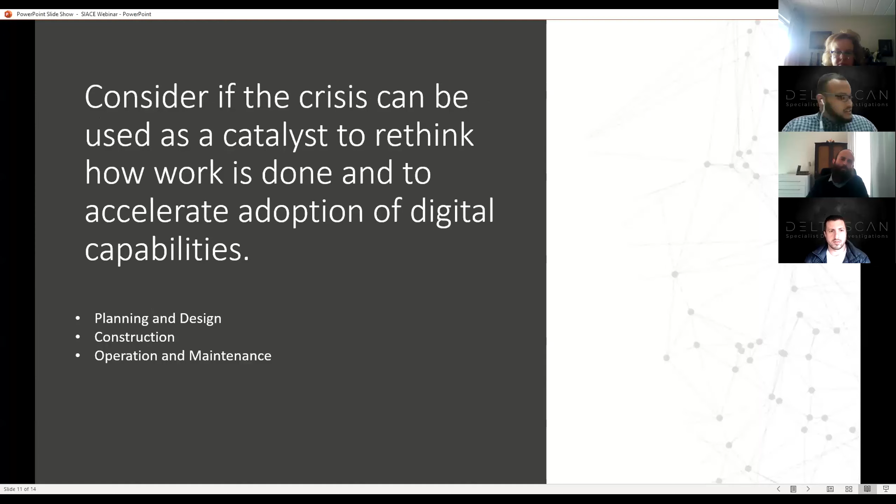Quickly, to speak around the technological pillars we'll be covering today: we are currently living in a world where there is a paramount amount of data around us. It's data, data, data, there's just more data. But us being pioneers, the best way of going about this is converting that data into knowledge, identifying the trends and patterns, optimizing the operations based on the trends and patterns one could extract, and then the final stage being the real-time decision-making process based on the more efficient data one has achieved.

It's at this stage that I want to hand over to our first panelist, Darryl Epstein, where he will be discussing some of his work that he's been doing in the industry, specifically around the engineering workflow. And then from there we'll be moving along to the rest of the panelists. Darryl, if I can hand over to you, I'll just stop sharing my screen quickly.

Cool, thanks Daryl. Okay, I'm going to just jump on my screen as well. Afternoon, evening everyone, thank you for joining. I'm very excited to have everybody here and to share some of the work that we're involved with. Really what it's about is education, getting the industry educated on what's going on in the market, what's happening elsewhere overseas, and how to swim and make it through these post-COVID times, and how digitization plays a part in that.

I'm a civil and structural engineer by profession. I started in contracting, I moved into design, and during my design stages I fell in love with tech. I fell in love with innovation in the markets. I love designing, I'm passionate about the designing aspects, but I fell in love with 3D. And that's one of the main reasons why we started that poll. I'm going to go into that a little bit.

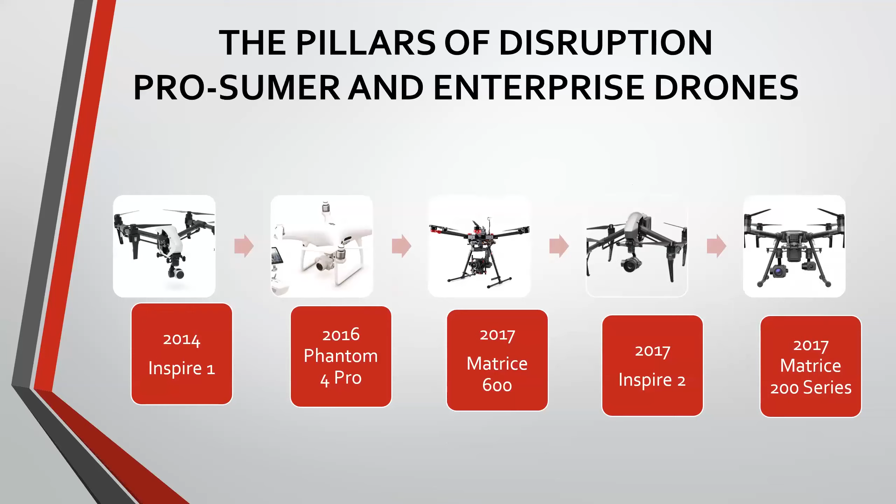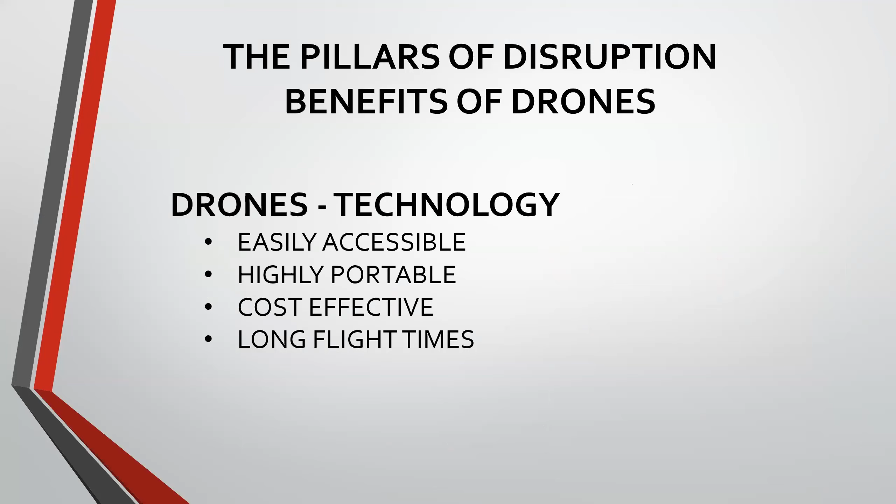There's a lot of very exciting drones on the market. They each do different things, but they basically carry your top of the range modern day sensors, your top of the range cameras that you can use in movies. You've got specialty payloads and many others. Why we turned to drones initially is, well, it's really the most accessible and cost-effective means of collecting data. If you're comparing it to your scaffolding, your cherry pickers, your rope access, it is very, very effective.

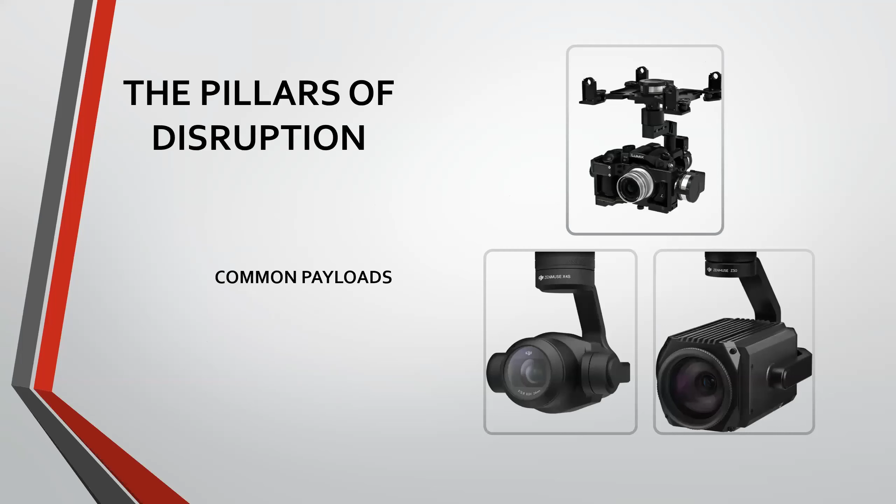Different camera systems we make use of. I'm not going to go into too much depth right now.

What's important to touch on is the technological progression, and this is the progression of comfort levels. It's really important to understand this. Starting out 20, 30 years ago and much further back, everything was done by hand. This is your engineering office, it's about hand drawings, calculators, rulers, and pencils. The limitation with hands is that it's not so easy to make changes and it's not so quick to get information out.

The next progression went into CAD. CAD came into the market and it provided efficiencies and adaptability to changes, because all of a sudden you can just delete a line, add a line, and you've made the change on your drawing, on your design. This is where a lot of the market got very comfortable. It took a big step to move over to computers, and there was a lot of resistance.

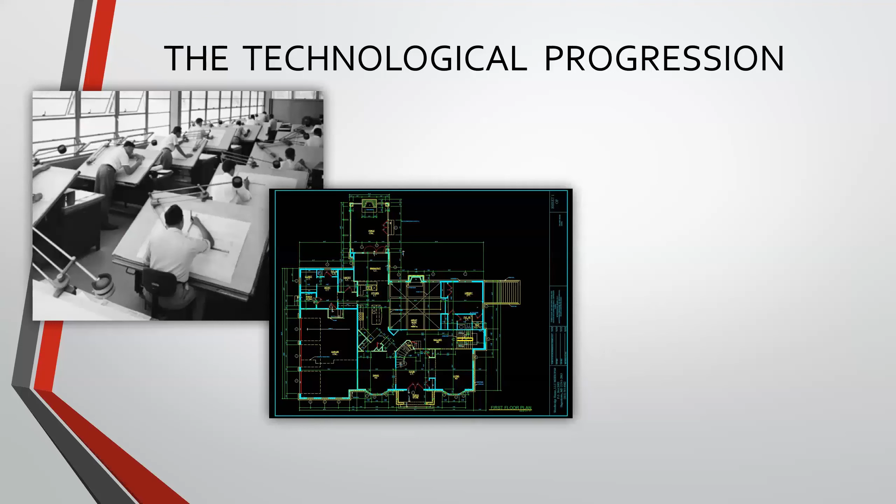The next change that happened after that, and the change that we currently experience, is 3D, three-dimensional designing. That's really about BIM, about integration, and integration being the key component that you can start fusing your information. You can start fusing your workflows with other disciplines. MEP, plumbing, electrical, architecture, engineering, now all work together. There's a really powerful synergy that comes together when you start working in the 3D environment.

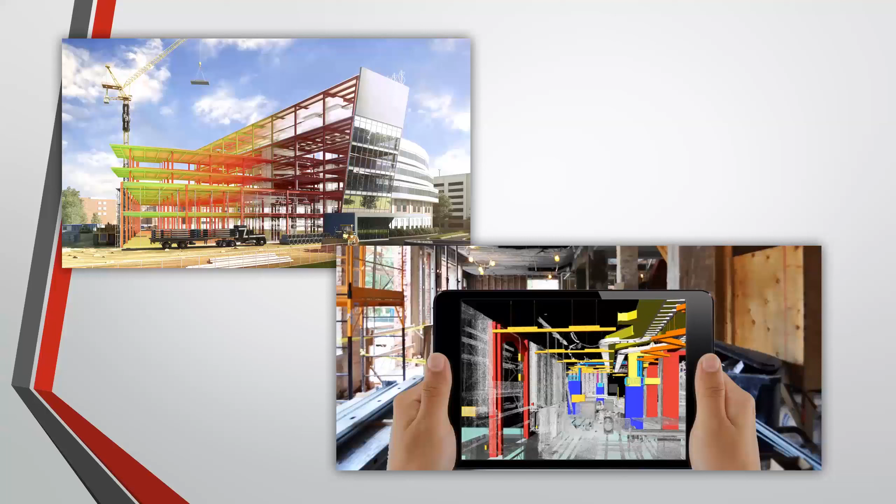What's now started happening is that 3D has become the norm. A lot of companies have adopted the 3D workflow, and the next revolution coming out of that is what we call 4D, or four-dimensional designing. We're talking about things like virtual reality, augmented reality. What 4D is about is two things: automation, bringing a lot of automation into the workflow, as well as optimization. Now that we're doing our designs, how do we optimize the way we do it?

Post-COVID-19, this is more relevant than ever, because what we're really looking for is how do we optimize the way we work now, and how do we go forward in this new era?

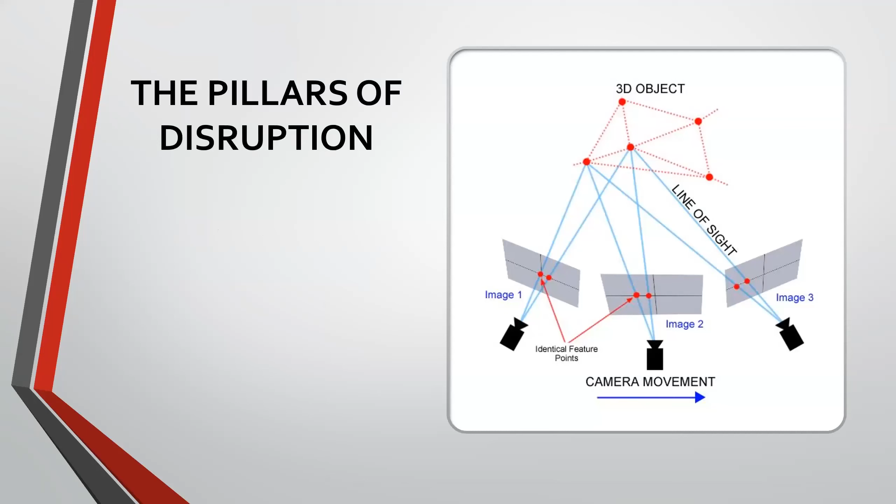So what we focus on is photogrammetry, digital workflows. Essentially what it is, is extracting depth from photographs. We take photos with the drones or from handheld sensors, and we reverse engineer what those photos show. It works the same way that human eyes do. One eye perceives colors; with two eyes, because there's a gap between them, because there's a space, your brain can make out the depth of an object.

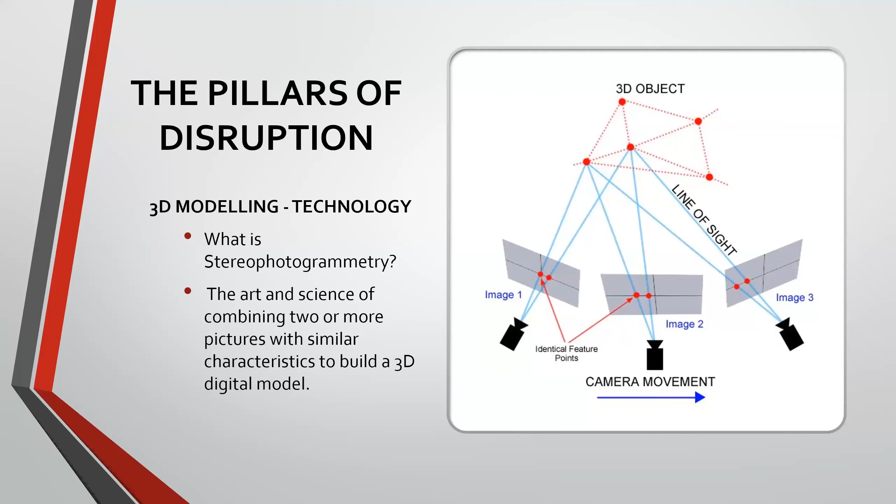The same reason that all modern day smartphone cameras have more than one lens: it's all about depth extraction. When you apply that to photography, you can reverse engineer 3D, you can reverse engineer engineering information. So we focus on infrastructure, and infrastructure is our game.

There's a lot of other uses for drones: surveying, surveillance, cinematography, agriculture. Companies that have embraced this tech are many, and this is one of the big fears in the market. Who's using it? How do we use it? Does it work? It's a technology that a lot of people are afraid of.

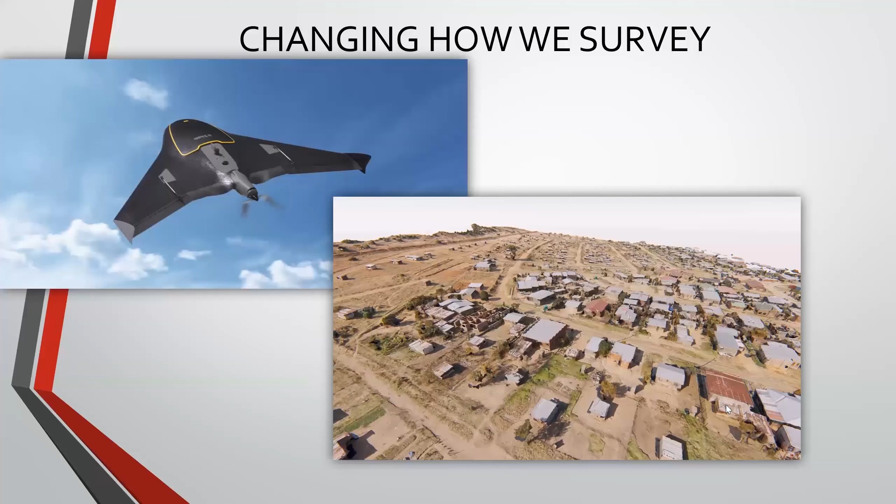But what I'd like to quickly start out with is surveying. Surveying has never been the same. Survey workflows are changed forever because of drone technology, being able to cover pieces of land unlimited in size very quickly, and being able to generate very powerful 3D models and get information from that. Starting out, you can get very high resolution, huge area maps. You can generate DSMs and DTMs, getting your terrain, and then you can start doing planning for stormwater and designing on site. This is a very powerful modern day workflow.

The second aspect is what we look at as scan to BIM, basically taking an asset and digitizing it, turning that into a format where you no longer have to be on site. And this is really the most significant factor when it comes to COVID, because all day long our phones are ringing. How do we do inspections? How do we do engineering and design without going to site? Can we stop sending our teams there?

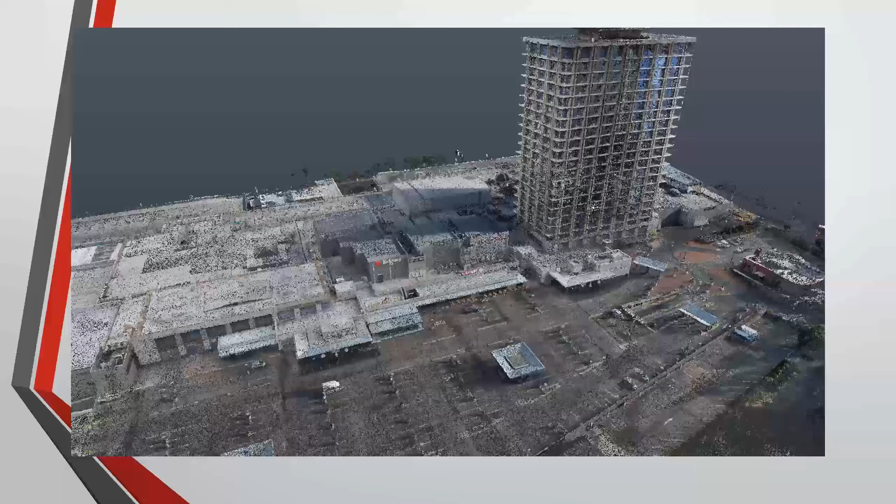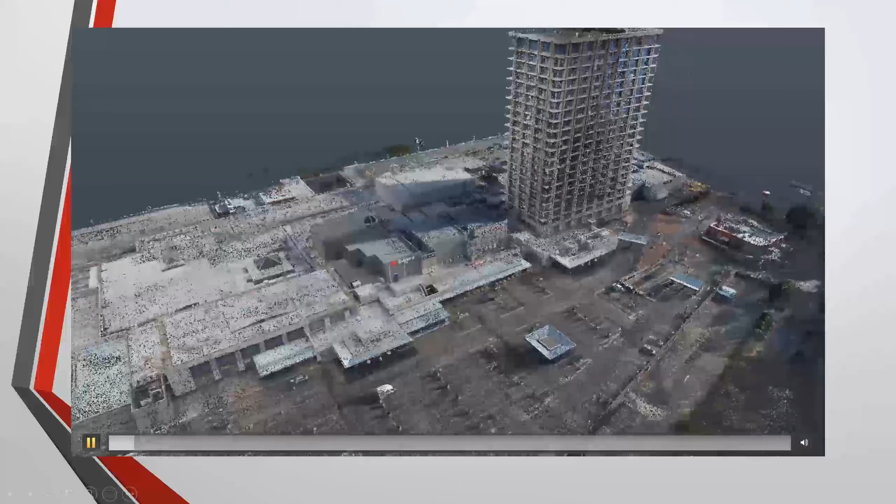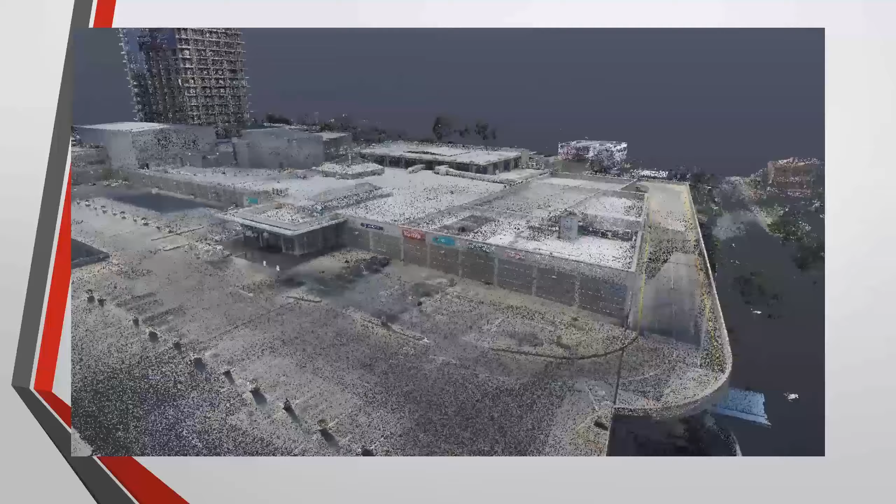So a very quick intro, here's a short video. This is a commercial block, a shopping center. What you see on the screen is a digital replica that was created using a drone. But this took hours on site - it was done within half a day of data capture. And what we're able to reproduce is an exceptionally accurate point cloud, an exceptionally accurate digital replica that you can integrate into any one of your modern day engineering design packages. It integrates into CAD, into Revit, into Civil 3D, and many, many others.

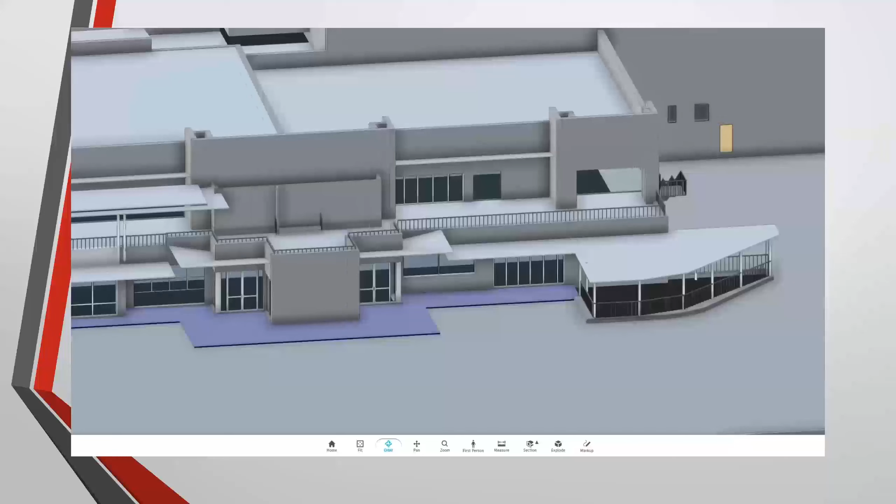And then this right here is the workflow post that. How do you turn it into an engineering drawing? How do you make that information accessible for council submission drawings, for renovations, for planning? This is the beauty of scan to BIM. BIM is about integration, it's about working in 3D, and it is a really, really powerful tool.

The next aspect is internal scanning. There's a lot of different technologies and different sensors we turn to. Drones are great for the outside, but they're not necessarily the best tool to use on the inside. What we really believe in is an integration of a multi-sensor approach. So internally, we can now start doing digital replicas, digital twins, and optimizing the way we can analyze and model that data. When it comes to doing inspections, the same workflow applies.

We can start doing things like overlaying design data, as-built versus the information you're getting from sites. We can start doing close-up inspections of infrastructure, of steel sections, of the paint condition. What you can see on the left here is using some of the latest in smart AI technology, where you're picking up clashes, where you're looking for tolerances during the design stage.

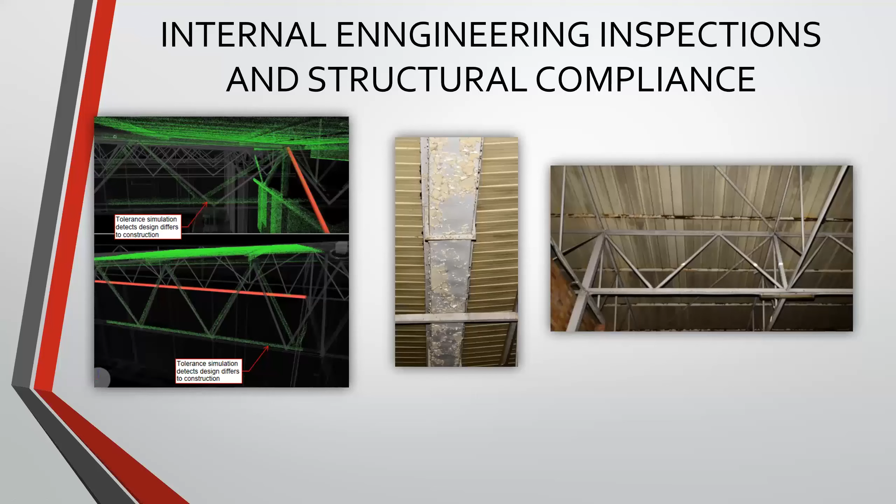So monitoring is one huge aspect which moves away from the design stage. And this is really about digitizing your construction sites, turning it into a digital replica.

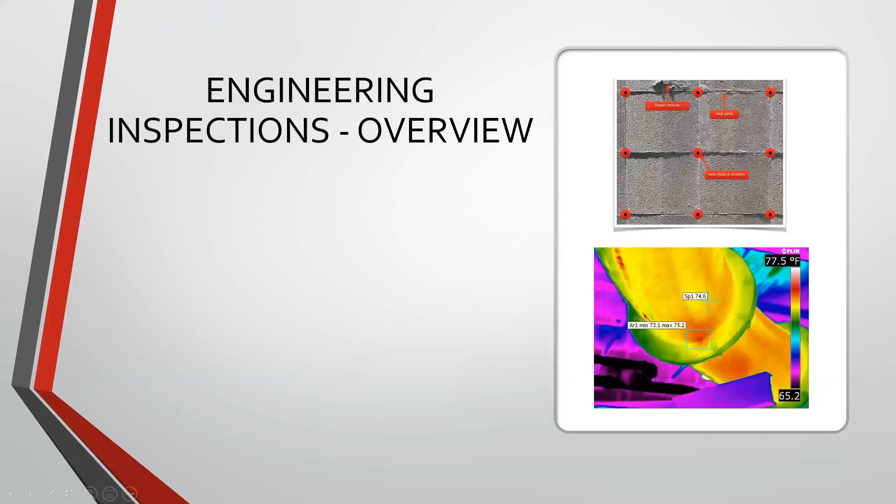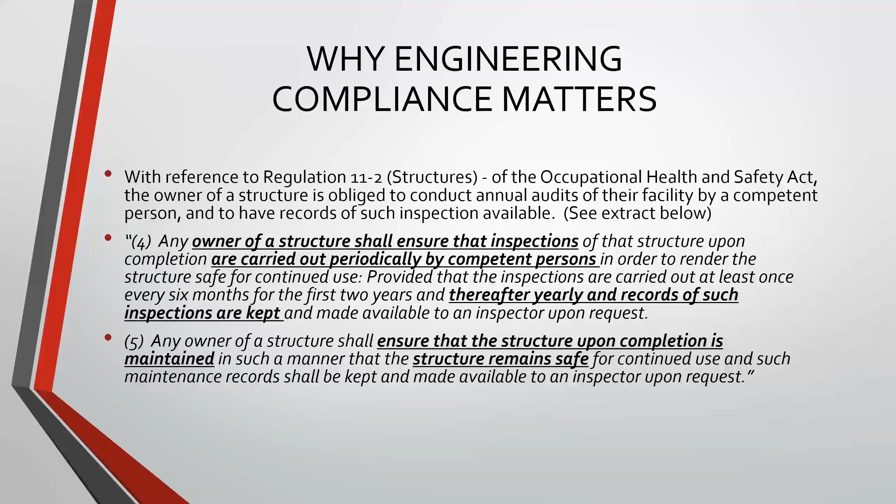I'm going to quickly fly through this. Engineering inspections is another major aspect, and really what this is about is taking the infrastructure and turning it into an ultra high resolution replica. Why it matters is about compliance - there's regulations for why it's important for an asset owner to monitor their infrastructure. They're legally obligated to do inspections on an annual basis. There's lots of applications starting with roofing, using thermal technology where we can pinpoint leaks on rooftops under waterproofing membranes - huge cost savings and optimizations.

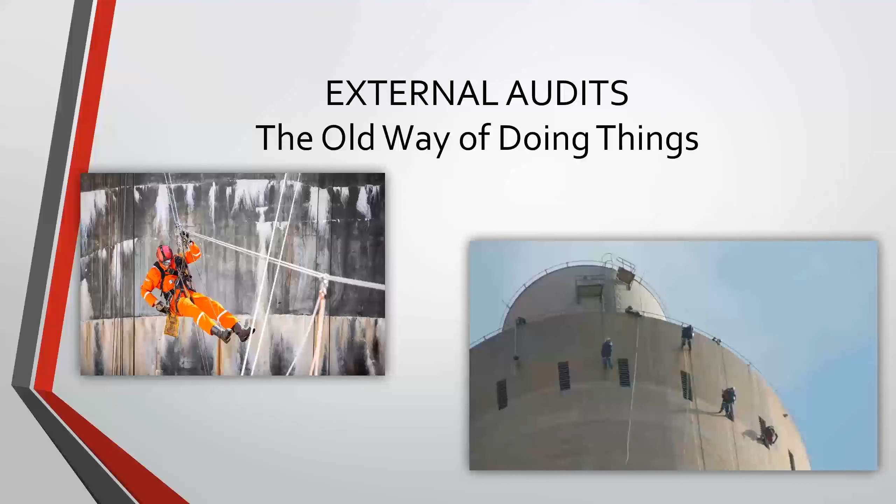When it comes to external audits, you're looking at rewriting the rules, reinventing the way that this was done. This is a quick intro to what an actual digital replica looks like of a site. Here we have a smokestack, and you can see this is in real time, in 3D, giving you a new way of interacting with that information and visualizing what is actually going on.

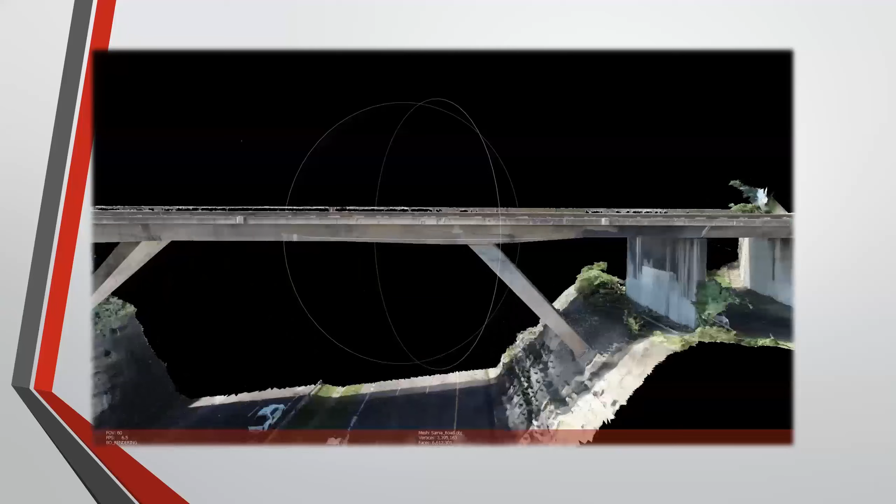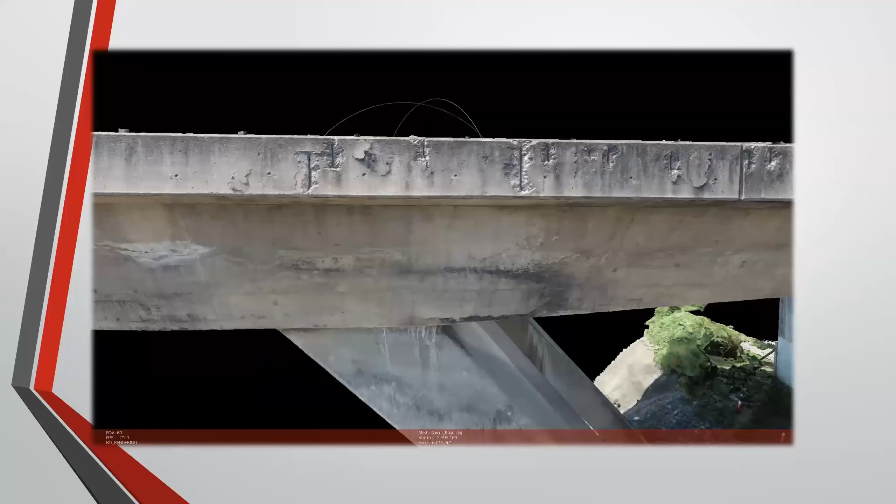We've applied this tech on many different types of assets, in industrial, in commercial. The next thing I'll jump forward to is bridges. The bridge management system has been forever changed through SANRAL and many other entities adopting this tech. This is a digital replica of a bridge, and it means you no longer close highways down or take weeks and weeks on site to inspect, but rather do it digitally, with much better information and more powerful tools than you had access to before.

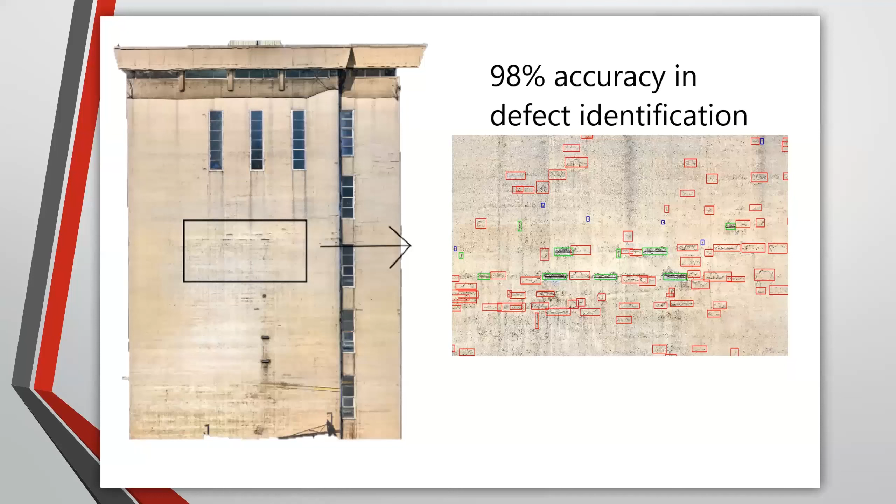Daryl, I know I'm short for time. One quick touch on a few other aspects, which is AI. These days, computers can do a lot of the analysis for us. Computers can see things better than humans can and can do it much faster. The way that we report on the information is different, and the way that we can transfer that information is really powerful.

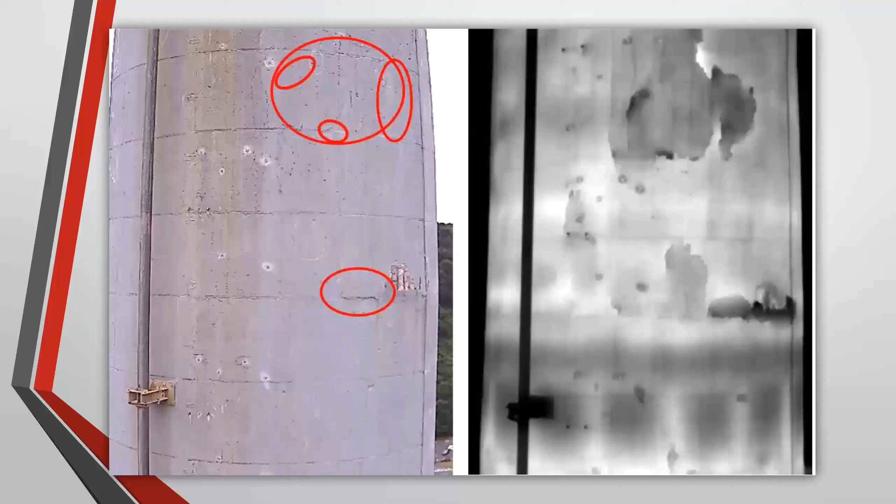Very quickly, thermal tech has also changed the game. Thermal technology allows us to look inside of materials to understand internal corrosions through spatial air pocket analysis and many other tools. The accuracy we get in quantification is hugely accurate. Reporting has changed, and the way we deliver tender documents has changed through the process. Very quick on other applications - I think, Daryl, let me stop there and I'll go into some of it a little bit later.

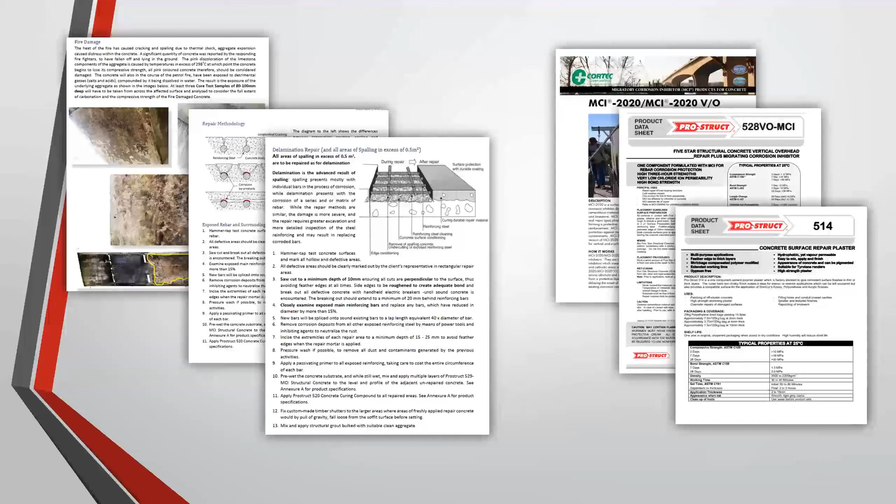Yeah. Thank you, Sure, Darryl. And I know it's very difficult for you to keep it within time management sometimes. I'm never good at that, no matter how hard I try.

No, but really, Darryl, thank you so much for that amazing input. I must say the work that we've been doing is very exciting, and I love sharing it to the people to show them what the possibilities are. It's like watching the Jetsons and all of a sudden seeing what's possible.

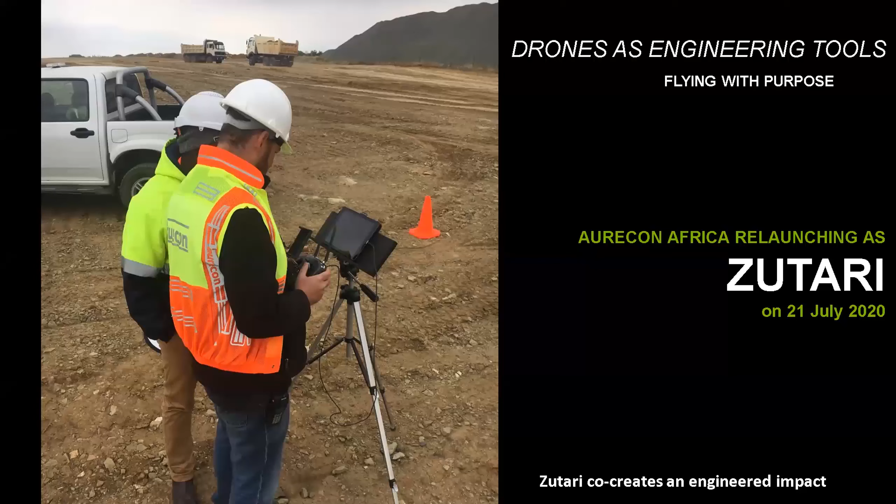Yeah, sure. Thanks, Daryl. I'm not going to spend a lot of time on introductions. We used to be Aurecon Africa, launching as Zutari next week. We are one of the ROC holders referred to as one of the 60 mentioned earlier. Between myself and Richard, we run the operation. Both of us are drone pilots - Richard more experienced on the design side, mine more on the construction supervision side. The combo of that makes for quite a good team.

Thanks, Louis. Folks, just really tagging on to what Darryl was saying, I think the common denominator behind all things digital is really information, and it's about how we as engineers and professionals in the built environment are interacting with information. A big part of that today is about how we leverage different technologies. The poll at the beginning was about what type of CAD you use, and one could rephrase that and ask, are you still using CAD? I think those of us thinking that 3D CAD is the way to go - that's maybe an intermediate step, but there's still quite a ways to go into actual 3D modeling and BIM.

When we talk about reality capture, again quite a bit of overlap with the previous chat, but drones fall into a broader category of reality capture. And like we said, photogrammetry is the principal mechanism that a run-of-the-mill drone would use to generate 3D imagery. It falls alongside laser scanning, which I think most of us are familiar with. But then emerging is also the Internet of Things, so sensor-enabled assets, and also using mobile phones. There's quite a lot to watch in this particular branch of what SAICE is looking at.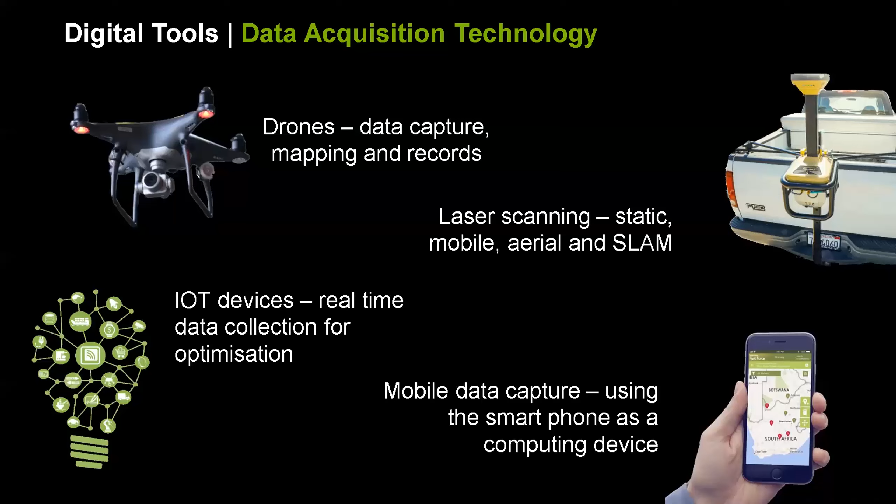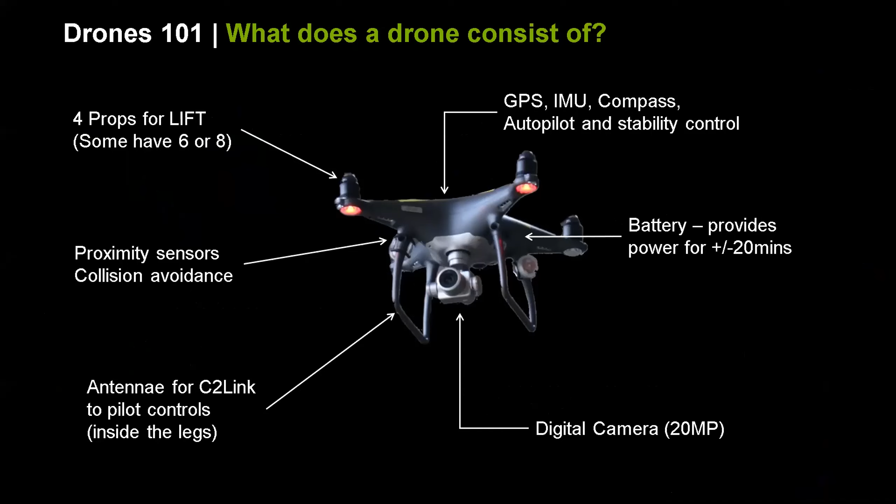Yeah, so what does a drone consist of? It's actually very easy. A drone is a flying camera, and that's basically all it's got. All of the rest of the parts is just there to keep it safe and keep it in the air. So that's the very basic principle of the drone.

And they are good for a few things, and they've got a few weaknesses as well. They are quite cheap, they're stable to fly. You look at the vertical takeoff, the kind of quadcopters, they can take off in a small area. Great photos, great videos, highly portable, and it gives us rapid results. So you fly today, you've got a result tonight or tomorrow to give to your design team.

Weaknesses: highly regulated, and we're going to touch on that a bit later with the ROCs. Limited flight time, 20 minutes in the air for the standard kind of drone. They only fly in the day. They don't really fly well when it rains, and you need quite a lot of permission. And there's some limitations, flying over people, flying over traffic. So it's not like they can just be deployed anywhere, but still a lot of value and easy to use.

So it's interesting, the idea of photogrammetry and survey is often brought into the same conversation. Our purpose of using drones in-house, we have a corporate ROC, which means that we don't sell our services to anyone else except ourselves. And we've really realized the value of drones in filling a gap.

And that gap is very specifically bridging the space between having poor data and having excellent data. The poor data that I think most of us are used to is Google Earth, or no data at all. And then the excellent data, according to our engineering standards, relies on rigorous survey processes that are signed off by a professional surveyor. When we look at that in context of the design workflow, pre-construction, there's a lot that happens in the months before we go to tender and before we start construction.

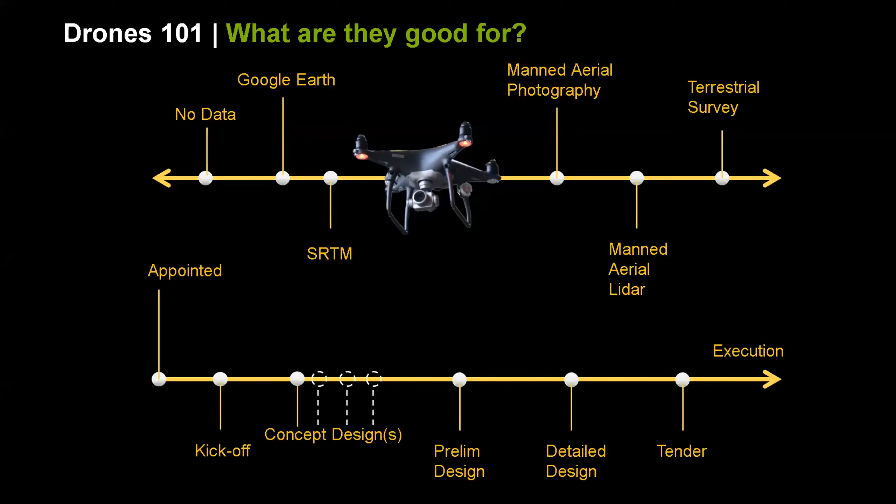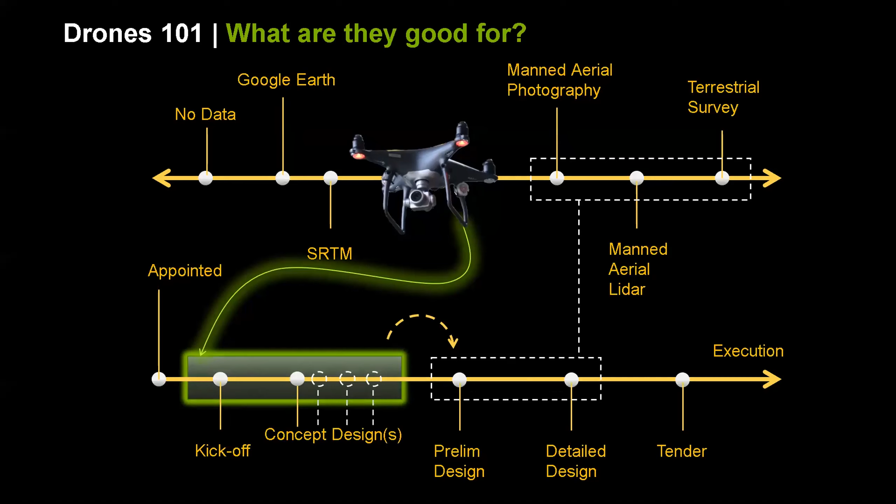And the value that we see drones offering our projects is in bridging this gap. We can deploy a drone very quickly to site, gather good information that is good enough to do our concept designs. It might not be pinpoint accurate, you're still looking at a couple of centimeters error in most cases, but it's good enough to get the design going. And then when the time comes to move into detailed design, we replace that reference data, and we're finding that workflow really works effectively on our projects.

So drones are good in our world. They're good for taking photographs. There are other drones that carry laser scanners, which are amazing drones, a little bit above our price point. So we're really leveraging that little drone there. That's a picture of our actual drone in flight. And we're getting the most done that we can using that technology.

We take photos, we process it just like Darryl explained, and then we export it into various different formats and take that into our planning and analysis.

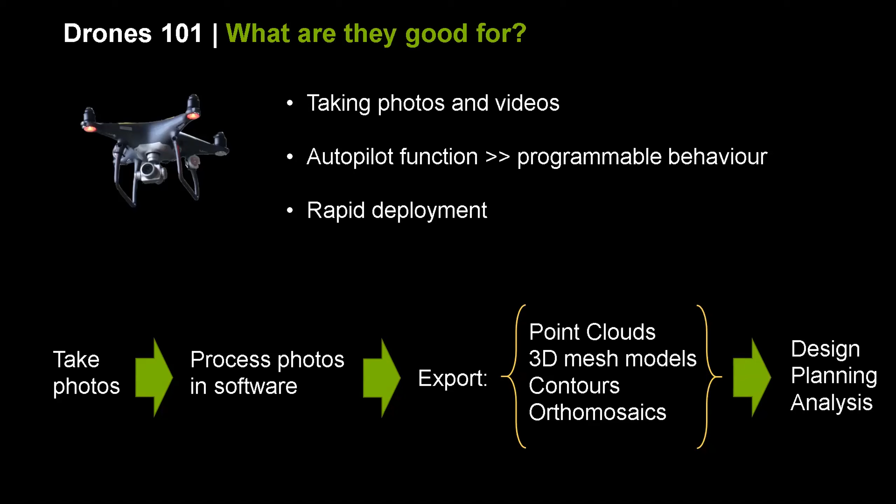So as an example, this is a job we did in Lesotho. What you see on the left-hand side is retained earth embankment. Right-hand side is the side of a mountain. And in the middle is erosion. That gully was deteriorating rapidly over time. And the assignment was to design the concrete works to line that channel.

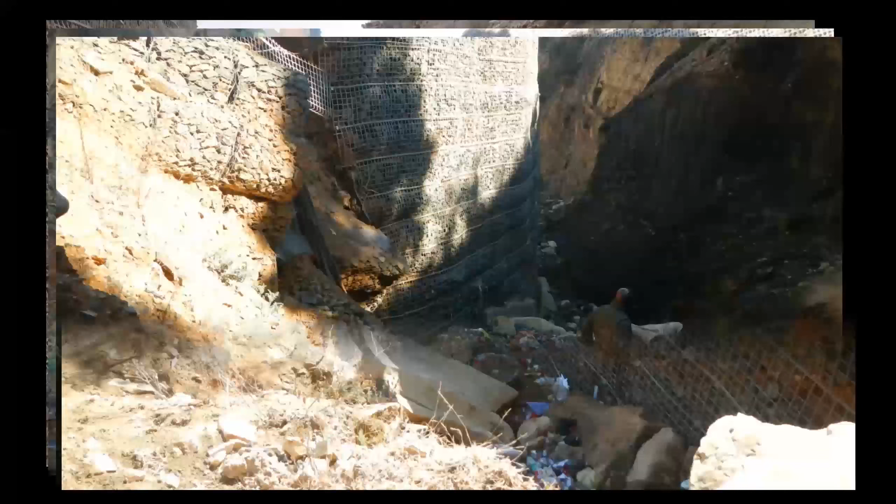And the surveyor was really having a tough time with conventional methods. So we decided to send the drone in. We took about 270 photographs up and down. And believe it or not, this was with a little Mavic Pro, a little fold-up toy drone just about. And with that, we were able to build this three-dimensional mesh model.

And then got to construction, and you can see the result. The feedback from the contractor was overwhelmingly positive, just the degree of accuracy that we were able to achieve in our designs, and also the way that we were then able to interact with the design information between the team sitting in Pretoria and this project sitting 7 hours drive away. So really, really effective use of the technology.

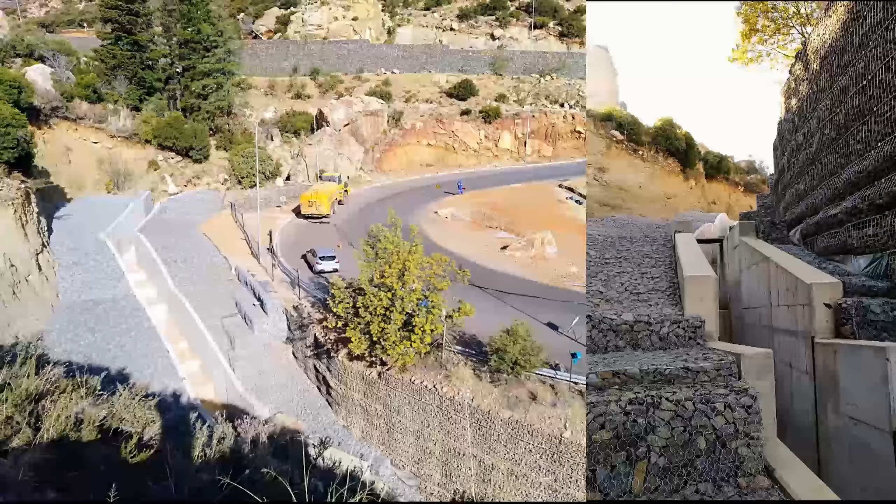So one of the other places we've been deploying drones on active projects is stockpiles, always a big element when it comes to cost payment, interim payments, and using a drone for material measurement is a no-brainer.

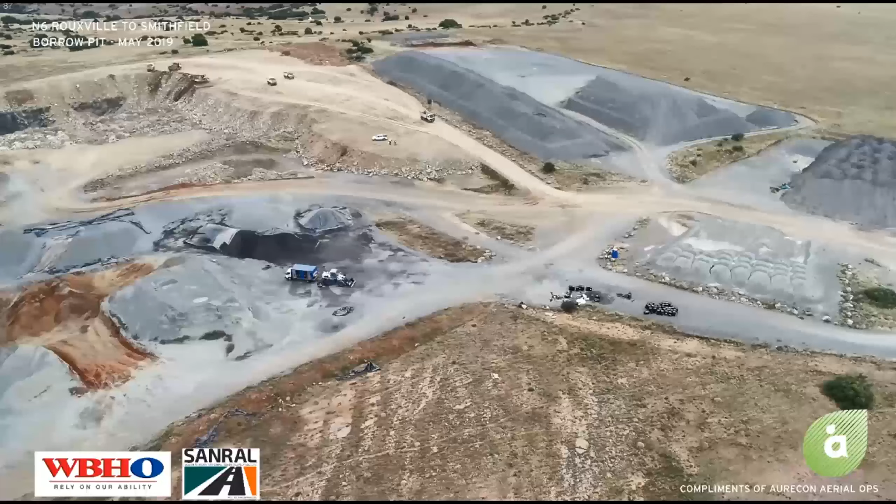You spend on a site like this 40 minutes on site, a few hours of processing, and you've got very accurate results. In this specific case, we actually had a surveyor on site. We took the drone and he took the conventional methods, and on the stockpiles we had a 3% and a 0.3% discrepancy, which means the accuracy is more than sufficient for going through that kind of exercise.

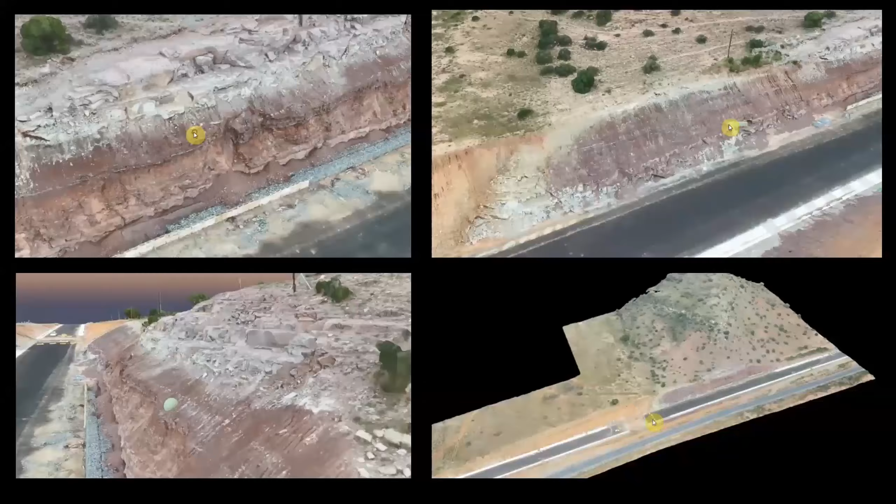On another project, with the retaining wall they were building, the mudstone started falling off the face once they started excavating and exposing it, which made it dangerous to access. We used drones to map the face and provided that information to the design team, which was able to come up with a quick fix and accurate quantities, helping the project and improving the timeline on solving this problem rapidly.

Whenever you've got a new shiny piece of technology, the question is always, what can you do with it? I think often the way engineers approach things is, when you've got a hammer, everything looks like a nail. So when we started this endeavor, we really had to take stock and say, what are we actually going to use this technology for?

These are the things we've identified that really add value in our business, understanding the way information interacts with the various different processes we run. Critically important when looking at any type of technology is to understand that technology is an enabler for a changed process. So we focus a lot on understanding how we work and then adjusting our workflows so they can make beneficial use of technology, rather than pushing technology at all costs. I think that's a really important takeaway for everyone on the call.

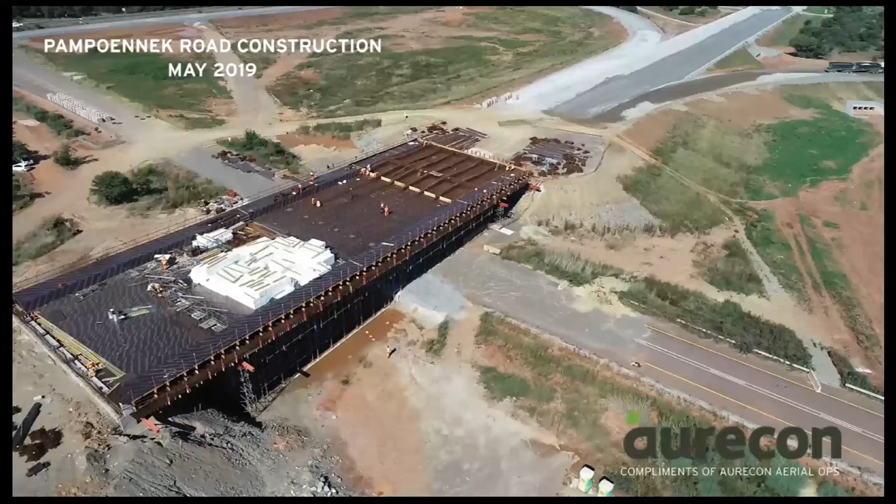As we mentioned earlier, drones are also good for some very nice videos, some great marketing material, and just capturing projects at various stages.

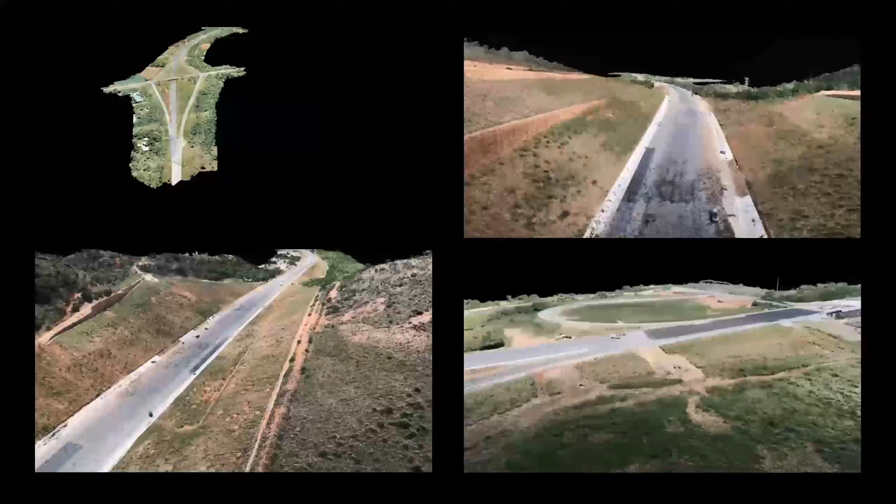As mentioned earlier regarding different technologies, in this specific case we integrated the laser scanners with the drone technology on a project to get that inside, outside, topside view of the project, all merged together. It becomes a permanent record of exactly what the status of that project is, and it becomes undisputable. This is a point cloud of a major cutting - getting that point of view is valuable to a client who sits in an office and doesn't get out to site, except maybe the PM, and it gives them a view of where their money is going and the status of their project.

We've used this, in this case as well, with drones on the outside and scanners on the inside, to start mapping assets where there's no details or plans existing - things that the government or other clients have. Again, this is rapid information capturing while the asset is live.

On huge sites, one day on site, and we were able to go from a Google Earth image to a good enough layout for a design team to start with a concept design. You can see it's quite a large area, again with the Phantom 4, and if you zoom in, the detail is enough with the contours to understand the lay of the land.

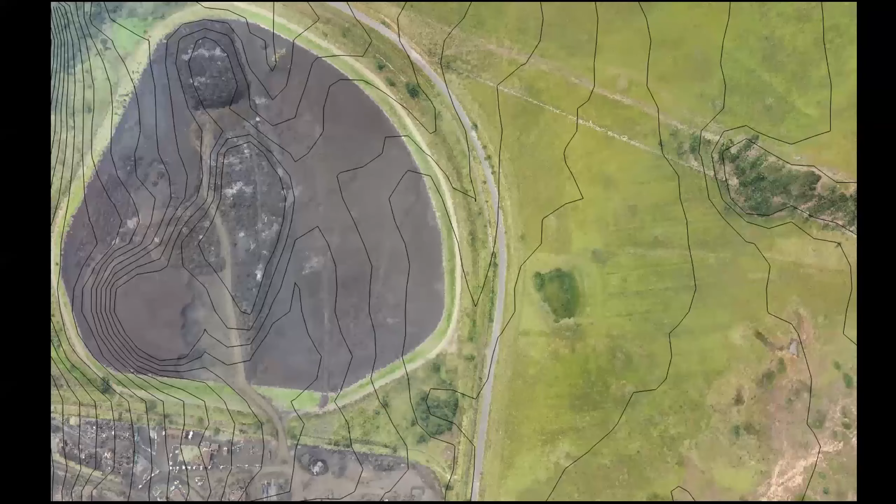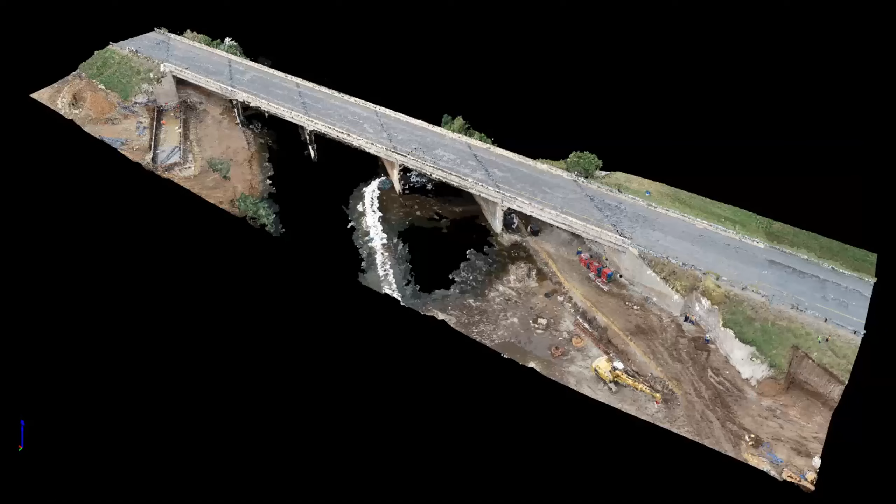We also had a look at bridges. Daryl, the technology you're able to process is fantastic. We wanted to see what we could do with the Phantom 4 and Pix4D, and in particular, we wanted to see how we could push this to get 3D. The point cloud we got for that bridge was pretty good.

Our Revit modelers were able to take this and do a retrofit of the actual bridge structure, which is phenomenal. If you look at that site, it's straddling a river, very difficult to get equipment up close, so being able to fly is really a bonus.

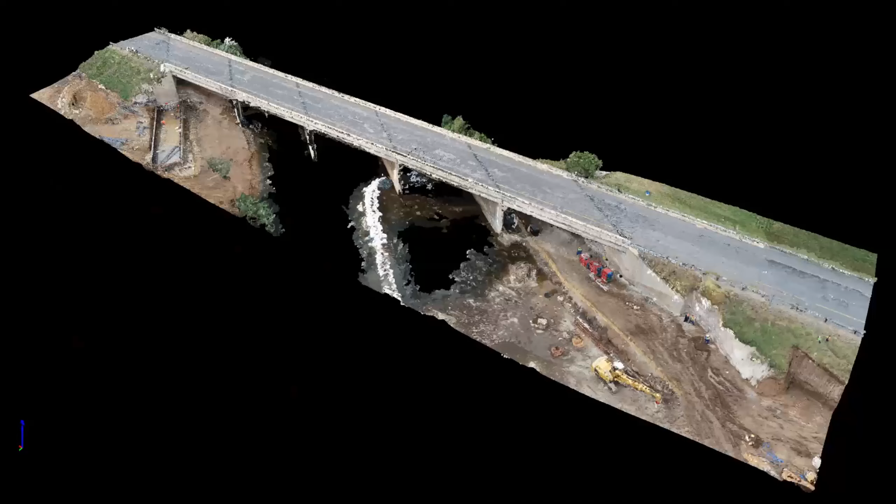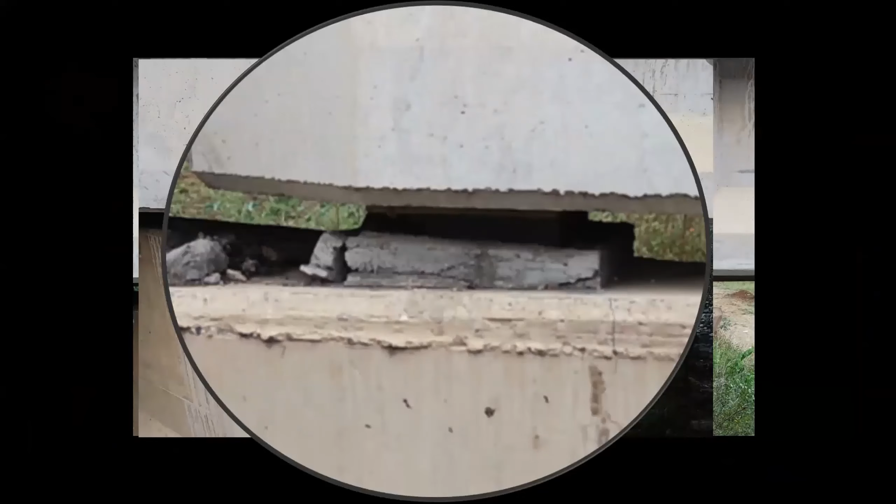The other thing is close-up photographs. This is kind of the dumb use of drones, but it's very effective - being able to use the drone like a camera on a very long selfie stick, getting that camera into an awkward position and taking close-up photos of, in this case, the bearing pads, and seeing particular damage which you wouldn't be able to see any other way unless you literally abseiled over the side of the bridge.

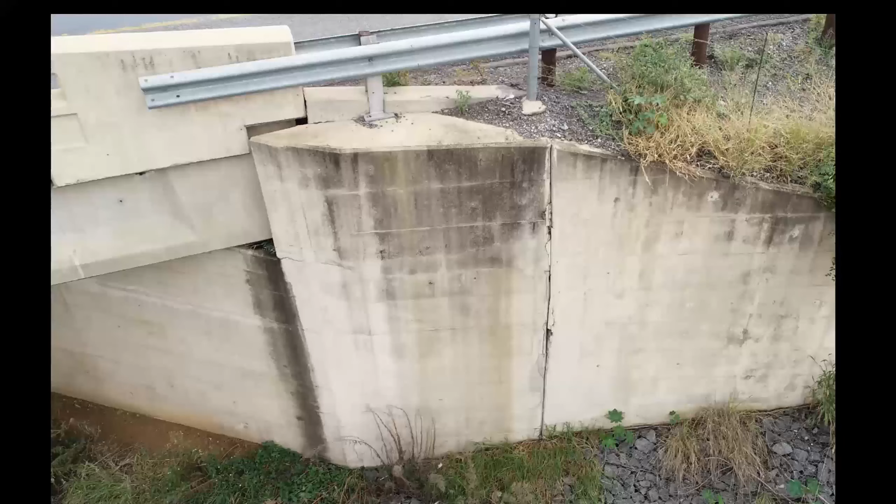And so, again, from a health and safety point of view, very effective, and then just getting all of those images. You mentioned digital twins, and obviously a big part of that is having a vivid visual representation, not just on models, but also on supplementary information in the form of photographs.

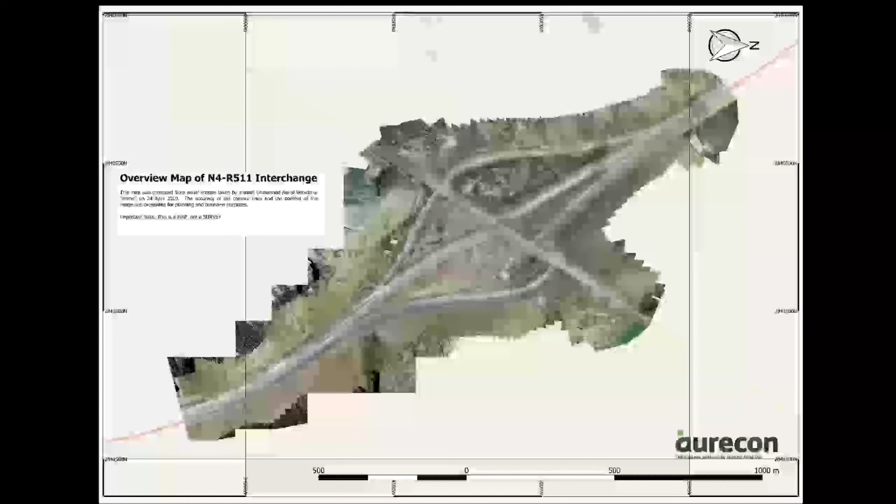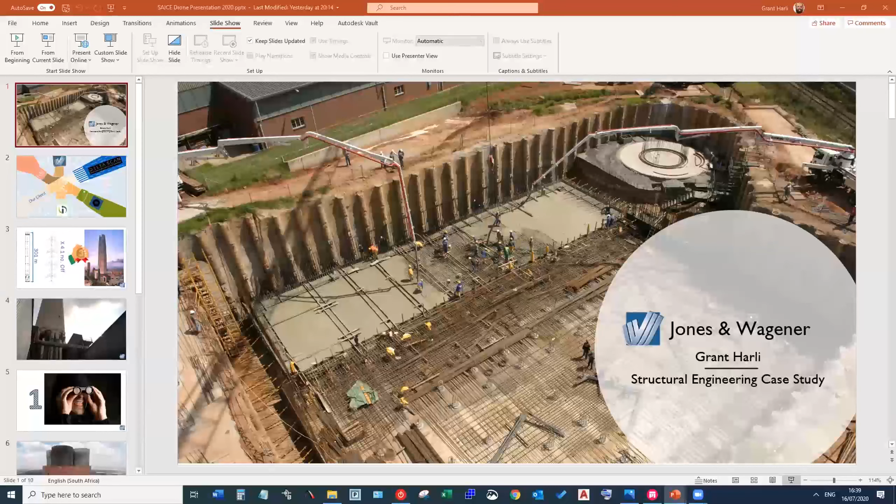Good stuff, okay, so let's just quickly talk about our experience using drones. And firstly, just to kick off, let's give credit where credit's due. This isn't a marketing slide, it's really just to show how we had different players coming together to make this project a reality. Firstly, I'd like to thank our client - you know who you are, you asked to remain anonymous, so we won't mention who you are.

Secondly, iGlobe, who actually flew the drone for us in this particular case - they did all the data acquisition. There's another company called Urban Soup that we utilized; they helped with the virtual reality capture and further post-processing and digitization. And then Delta Scan also helped with the post-processing and development of 3D models. So we all came together, made this thing happen. I think it's important to point out, as Daryl said, they aren't drone operators, but they offer a very specific service. We offer as Jones & Wagener a specific service, and so do the other people on the screen. Coming together, you can really create some really interesting products and deliverables.

Okay, so in a nutshell, what we were tasked to do is we were asked to look at using drone technology and whatever associated technology we would like, as a proof of concept for conducting a number of studies on a smokestack. It's not the smokestack that Daryl showed earlier, just to let everyone know.

So the smokestack that we looked at is a whopping 301 meters high. That's enormous - if you think about it, it's 4, or 4.1 to be exact, Airbus A380s - those massive jetliners - stacked on themselves from tail to tip. And it also wins the prize, and South Africa should be proud of this, for being the 3rd tallest structure in the Southern Hemisphere.

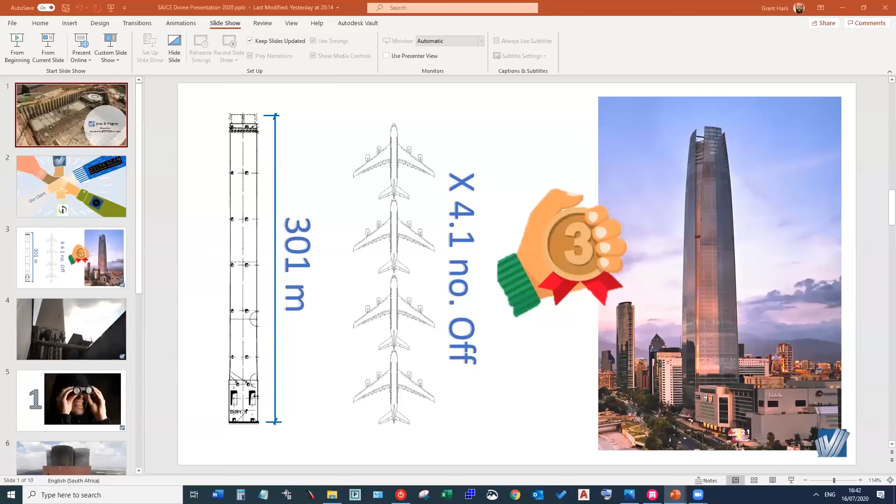Okay, so just quickly, I want to share 3 reasons why I think drone technology, post and pre-COVID, really is an essential tool for engineers going forward.

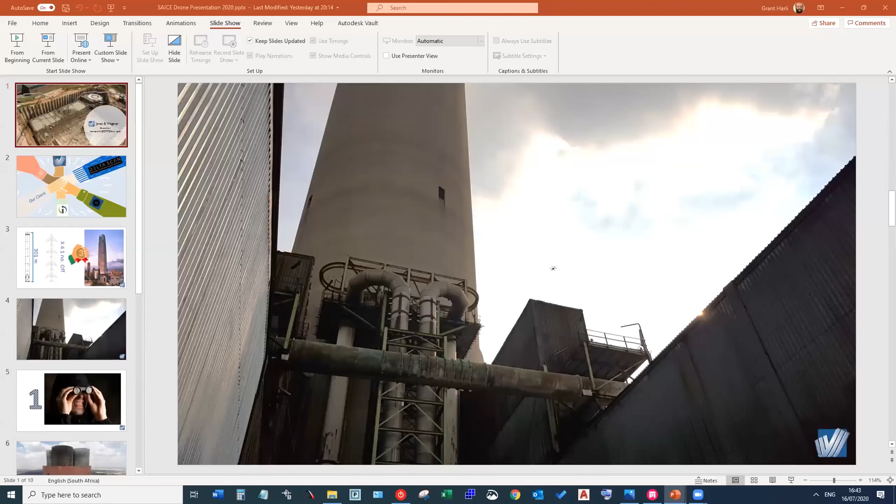The second approach is to use qualified rope access technicians, who certainly still have a place in the market and play a very important role. I don't want to say they don't, they really do. What they give you is a close and intimate view of the concrete - I suppose only an engineer can use the word intimate and concrete in the same sentence, but anyway, that's what they do. At the end of the day, you're faced with 2 extremes: this really far view of the whole stack, or right up against the thing, and there isn't an in-between phase.

And it's touching on what Richard said earlier. And just for all the listeners, Richard and I didn't coordinate our beards before this discussion, I can assure you of that. Anyway, that's why they're very, very useful.

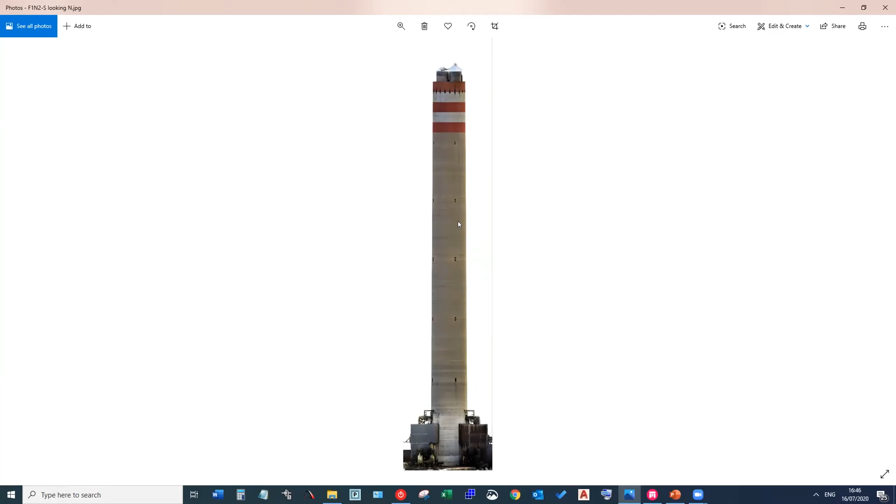If you think about it, especially on a big oil, petrochemical, or power plant, whatever you're dealing with, there's no way you're going to get an overall view like that. This is a series of photographs digitally stitched together on a 3D model, but the actual resolution is mind-blowing. So I'm just going to zoom in - and you can see I still haven't got any fidelity loss at this stage.

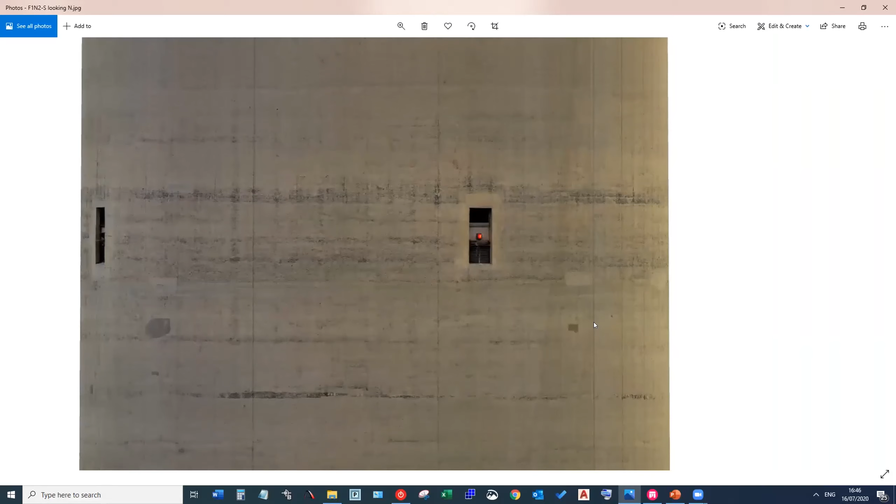Okay, and now we're starting to see the magic. I can clearly pick up old places where patch repairs were done - you can see there, over there. Hopefully, I don't know what resolution this presentation is coming out at for you guys, probably 360p, I'm not sure, but the resolution is really, really phenomenal - there's no other way to put it. It's really exciting. You can see there's been a lot of loss of fines due to the environment, and around this light window there's clearly been some patchwork. As an engineer, you can now get a view of the whole structure and really see what's going on.

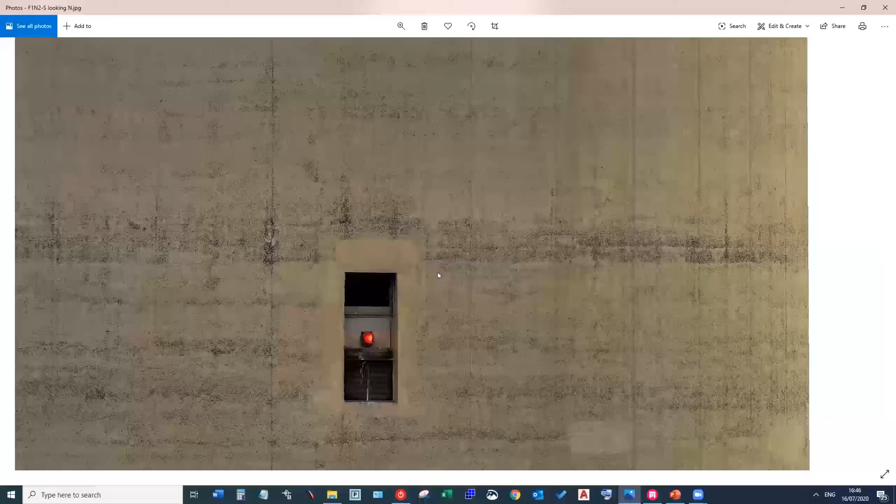I just want to look at a couple of other things here. You can even make out the panel formwork where you had grout loss occurring while this thing was being constructed.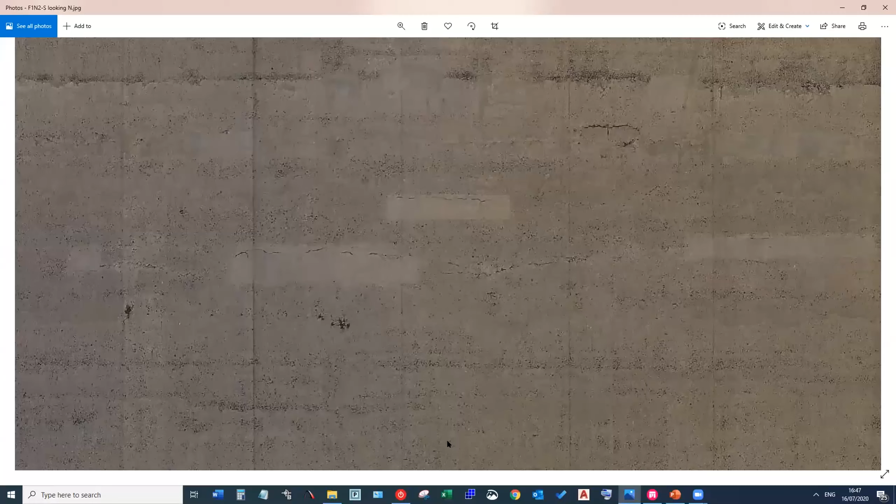Just looking around at some other things. Here's some patchwork - clearly that's failed. You've got some cracks going on there. So with carbonation and water ingress, that's just going to get worse over time. And you can identify it, you can measure it. It's all there in front of you as one facade.

We've actually got all four facades. And if you wanted to, you could actually do a UV unwrap of the whole thing, so it's one flat image of the entire circular structure on your screen. Really powerful stuff, really, really useful if you're planning any kind of refurbishment work, or assessing or trying to come up with quantities of refurbishment.

So yeah, that's that in terms of the second reason. Let me just quickly pop back into PowerPoint. Okay.

Okay, so really that's nice. Then we actually took it to another level. So with the help of Urban Soup, what we were able to do, and I'll hopefully demo it, is we were able to create a virtual reality experience of the actual stack. So it's not a 3D model that you're zooming around a point cloud - not to say that that stuff isn't useful, it is hugely useful - but as soon as you step into a virtual space, it's a completely different immersive environment. And that has its pros, but over and above that, once you're in that 3D space, you have the actual defects that you're trying to find right in your face, and you can plan things very easily because you have all the infrastructure surrounding.

Okay, Dayle, you've got my smokestack in 3D. Good stuff. Okay, so here we go. Here's the smokestack. So I'm just going to move my notes around a bit. Okay, so this is the actual smokestack now, in real time - this is not a video, a pre-recording or anything. I'm shaking my mouse from left to right, and you can actually see it.

So you look - oh, there's that A380 that we were talking about. So, you know, I'm now navigating around this thing at my desk, which is mind-blowing, right? In Johannesburg, looking at the stack that is hundreds of kilometers away from me.

I'm just going to fire around to show you. And you know, I'm not running a supercomputer of any sort - it's a laptop with an exe file. I don't have any fancy software. So now you can give this to your clients and deliver it to them.

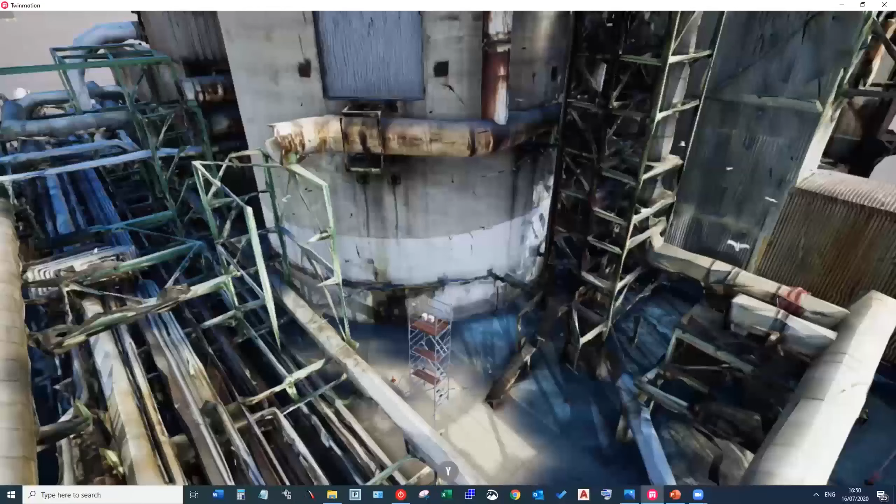It's just - you can see the surrounding infrastructure. So now if we had to plan refurbishment works and you handed this over to the contractor, you can clearly see, oh, where can I build my scaffolding? We added the birds, by the way - the birds were not part of the original scan. Obviously there's an eagle, I'm not sure what an eagle's doing there. Anyways, so you can clearly see the use of having all this infrastructure surrounding the stack and trying to plan around it.

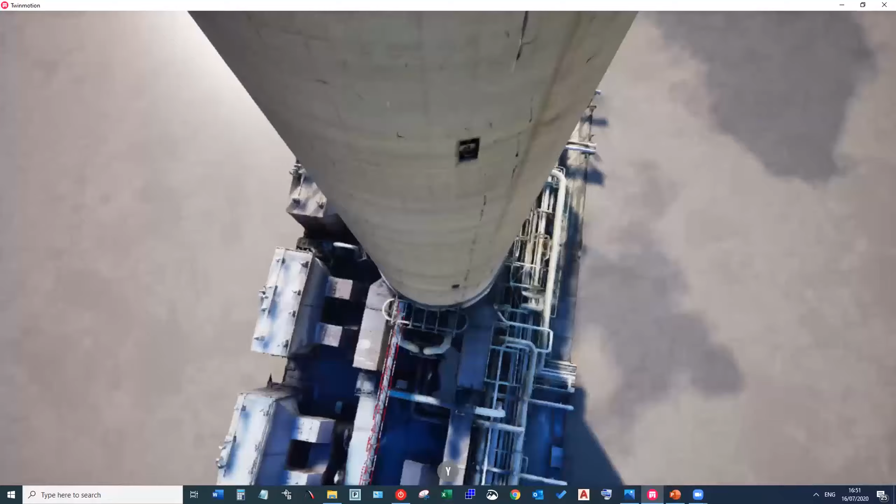You can go right up to this thing. And these textures, just to re-emphasize, I hope the audience is realizing that these textures are not a concrete texture that we kind of imported from a material library - it's the actual texture on the actual stack. So if I wanted to go to a specific defect, I could look at it, see where it is. Okay, I'm up this high - it's measurable. How am I going to get there? What am I going to do? So, yeah, that's the third thing.

So at the end of the day, what we wanted to do is show the clients that yes, we can use drone technology. It's definitely hugely viable, and we should use it going forward for condition assessments, for planning refurbishment works, understanding the context of the thing.

So just quickly as a recap, the first and foremost thing is these drones give visual accessibility to another level. You've got greater contextualization with less effort. These ultra high resolution facade maps let you see all the defects in a single image.

It leads to a more accurate assessment, better planning, and then you have an as-built digital twin that you can hand over to your client. They can strap on a set of virtual reality goggles if they want, be in the space or not. You can still use your laptop like I am and view this model anywhere. You could send it amongst your organization. So for planning, asset monitoring, and user friendliness, it's just huge.

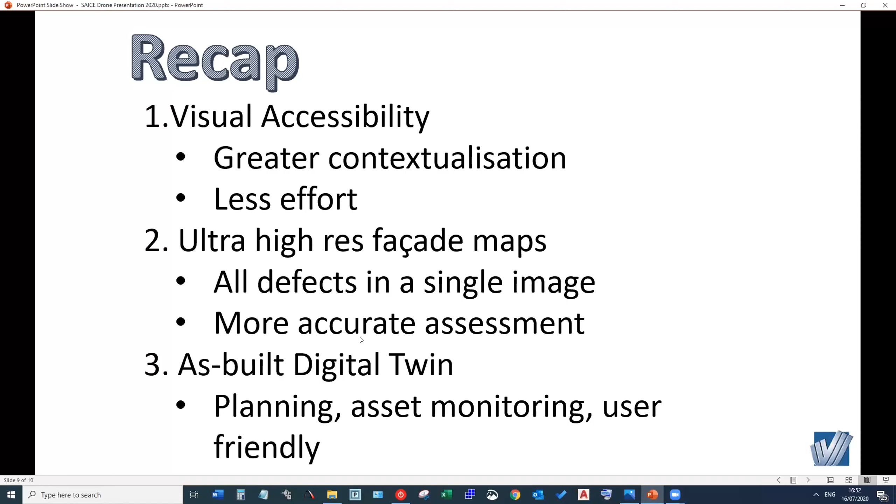The application is huge. So yeah, just to end off again, these are our guys that we got involved, and it was a success. It was a proof of concept, so there wasn't an official scope, it was a bit blurry. The lines were a bit blurred in terms of what the scope is, but we're continuing with it, and hopefully we're going to take it to the next level and develop it further.

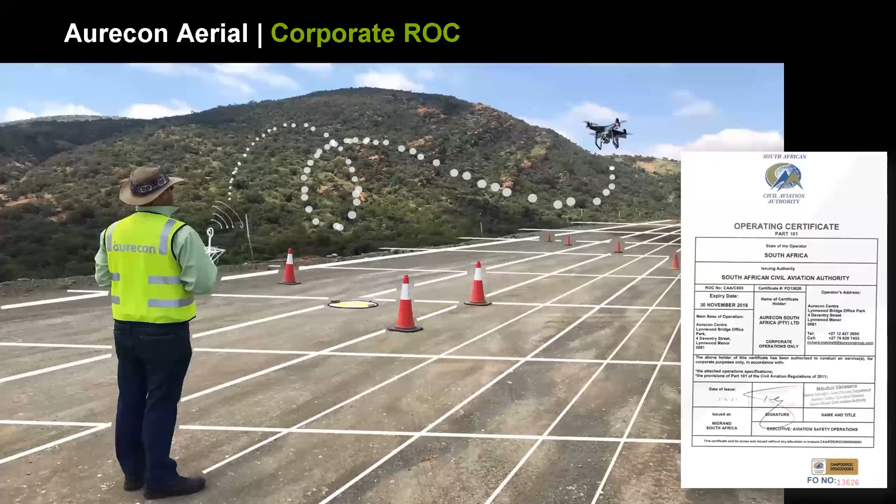As a new wing in the company, initially, as you guys know, adoption of technology was quite a struggle to get through all the loopholes, and unfortunately at the start, CAA did not make it that easy, but we stuck in there. The corporate ROC has really opened the door for us to become expert specifiers in the technology, being able to easily deploy the crafts, easily deploy the technology to a project. But yeah, it comes with challenges, and there's still quite a few rules of things we can and can't do.

So in terms of a corporate ROC, Richard, if you can maybe go on there. Those are the kind of operations we can do and the places we can fly. We can actually operate at national key points, and we can do a lot of things which is normally seen as not allowed when you use a drone. But again, we're also not allowed to, as Richard mentioned earlier, sell our drone services.

We don't, at the moment, we can't tender for drone services because we've got a corporate ROC and not a commercial ROC. And yeah, it's something we're working towards, actually converting ours from corporate to commercial.

So I think some of the insights around operating, yesterday Louis and I actually attended an aviation security course at one of the aviation schools. And the comment that they made was that we're essentially an airline company because we're operating airplanes. I know that sounds a bit funny, but Darryl, you mentioned at the beginning that we're intruding into the space of manned aviation, and that's exactly the point. So we knew what we were getting ourselves in for when we went after the ROC, and it has definitely proven quite a job to maintain that.

There's a lot of admin, there's a lot of discipline required, and the biggest thing that the Civil Aviation Authority is after is safe, controlled operations, so that we know at any given time.

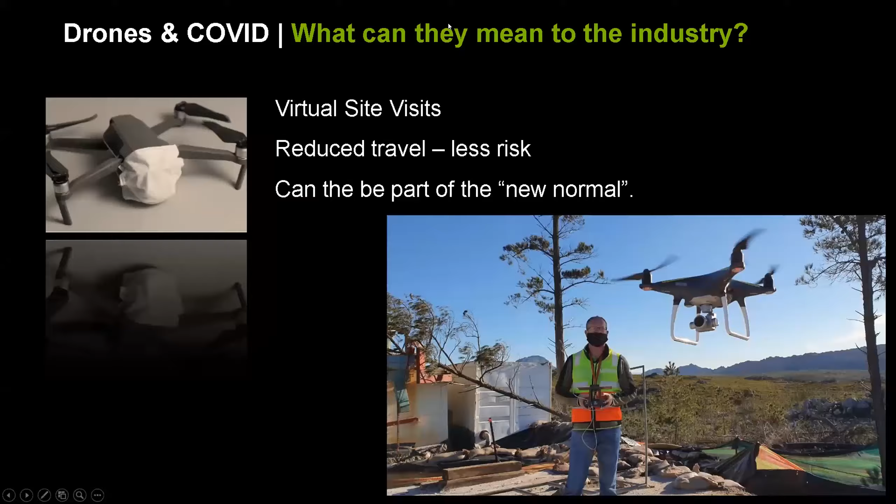No, Richard, Louis, thank you for that input. And I must say, from my experience, yes, it is a bit of a process, but yes, also rewarding.

But also on that topic, guys, understand that there are 64 companies out there that you can contact to also outsource this, to capture data legally as well. So that's always an option. Let's not forget about them at the same point.

Darryl, I think, just to allow for 20 minutes of Q&A, I'm going to just wrap up with you. Maybe if you can take us into specific industry use cases that you feel are applicable to the topic we are currently discussing.

Cool, thanks, Dayle. Please feel free to share screen. I'm not going to do a share screen, because then I'm really going to get into it. But I just want to touch on a few significant areas. Because we're an independent entity, we see the market very differently to individual companies, because we see it from a bird's eye view, and we get exposed to many different aspects of engineering.

When I started out, I was predominantly focused on structures, and over the last couple of years, because of the work we do with drones and digitization, we've been involved in everything. We're working with companies that focus on pavements, specifically looking at roads, at bridges, at transport infrastructure, and the huge power it allows you to bring into that workflow.

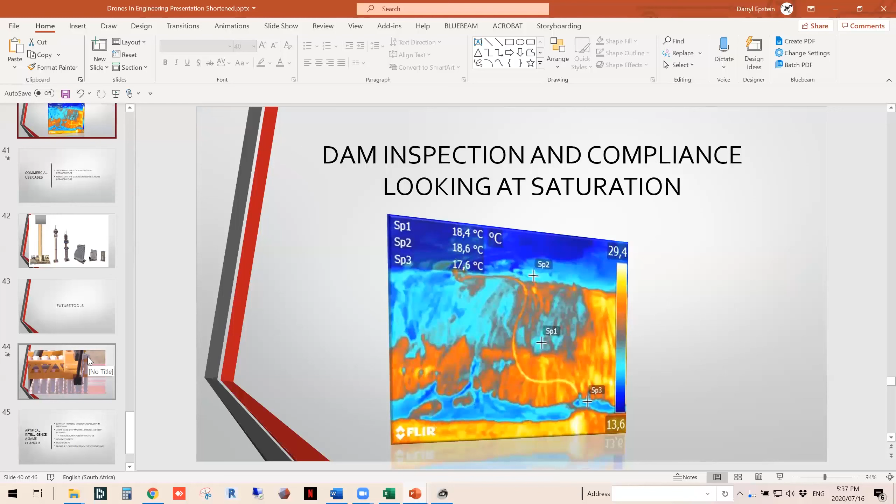I just want to add one last thing, which is quite funny actually. I came across this in the last week. I always used to make a comment to surveyors: a drone can do the investigations, it can do the surveys, it can give you the beautiful maps, but you're always going to have a job because somebody has to set out the pegs, somebody has to set out the site. There's no way a drone is going to be doing that.

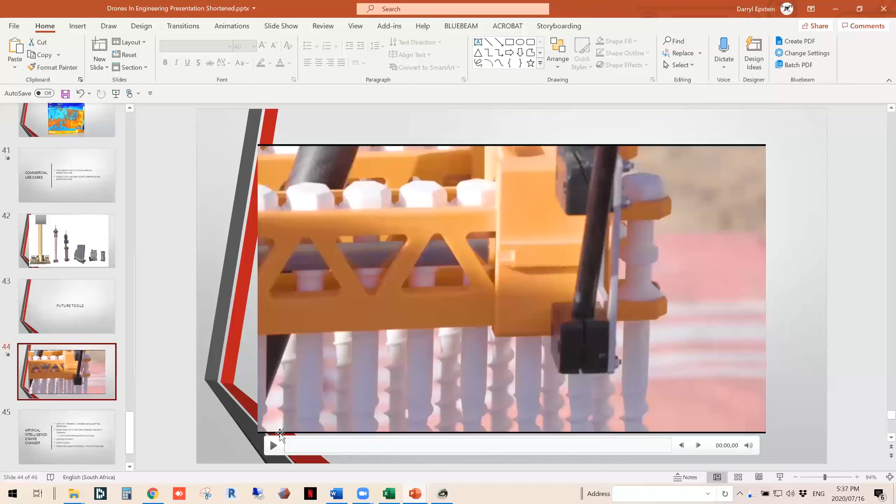And then I came across this video. Just want to make it a bit softer. I don't know if you can hear me over the sound of the video, I'm going to turn it down.

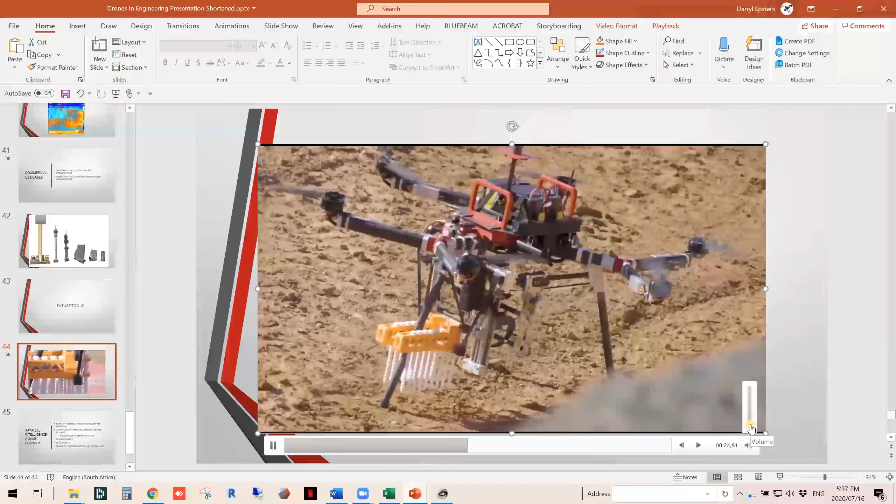All of a sudden, a drone comes out on the market, taking the market by storm, which is a construction setting out drone. It sets out RFID, fully automated pegs using RTK systems to within 5 millimeters of accuracy.

And this, again, is the next disruption that the surveyors are going to have to deal with. It's another tool to have. This drone, you basically plug in your engineering drawings of all your sites, the boundaries of your properties, of your roads, whatever it may be.

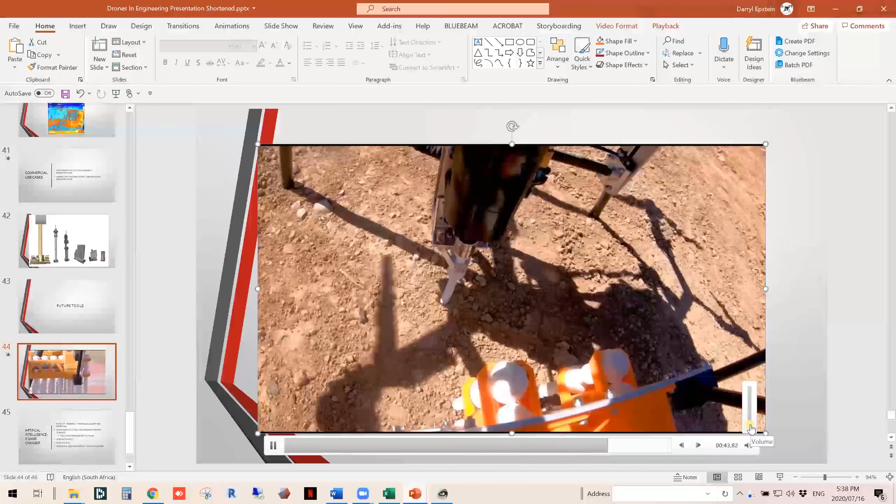At any time, day or night, you plug that into the drone and say, set out my construction site. That's the speed of this technology. It's evolving constantly, it's amazing, it's fun. You really just got to keep your eye on the ball and embrace the stuff.

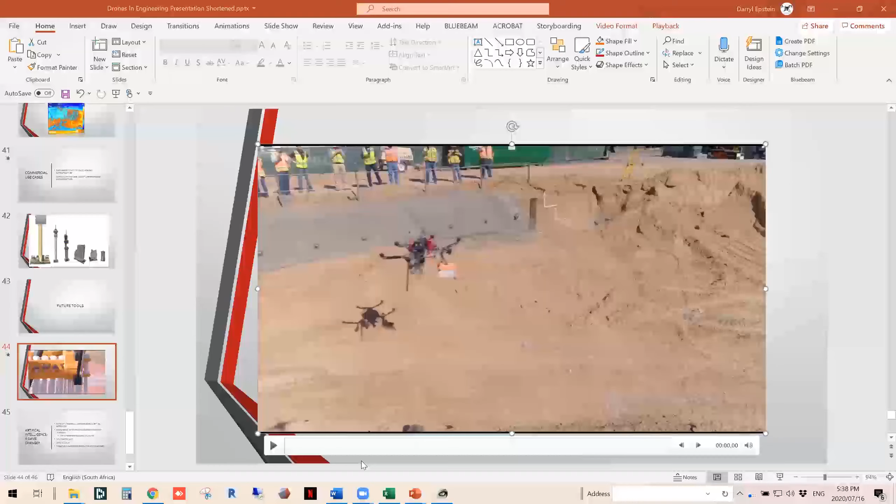I think that's what I'm going to close with. Darryl, thank you very much for that very humorous conclusion. It just shows, you think you're ahead and then somebody comes knocking on the door with a brand new thing and you have to completely relook at how you do things. But I guess that's within the nature of integrating this type of technology.